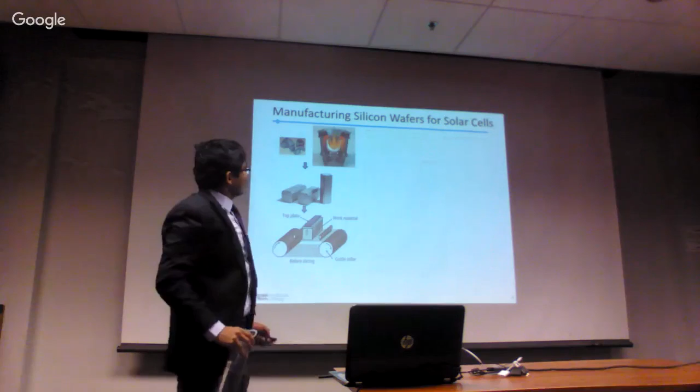I saw him as I was driving in, I saw him walking. Okay. Everything, so we are recording by 3.5. So this is the camera also recording. Here you go. I have another thesis. For somebody? I don't know. Okay. So this one is recording. Somebody going to adjust the lighting to make sure that you're visible? Okay. Is Dr. Neu here? Okay, I'm starting to record. Ooh, look at that. Record is on. Share is on. Right. Now I'm starting. Great. Can you see if I'm standing here? Do you see it? This works for you.

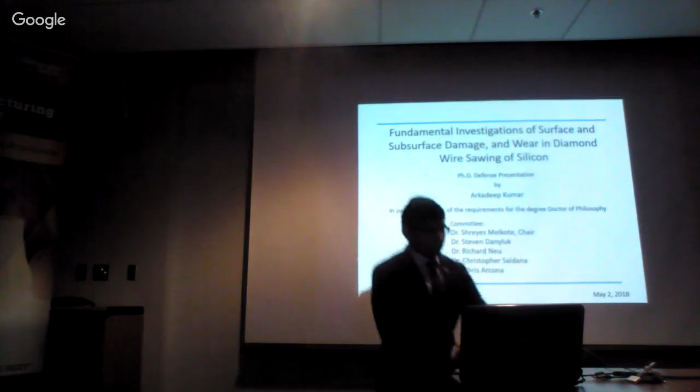So, do you think these lights? You don't want to be in the dark. They won't be able to see you. I wish there was a way to adjust. Only this thing? Okay, yeah. What do you want to do with the lighting? Unfortunately, I've only this bank of lights to go. Only this one, not that room. Okay, what about this? So this is the yellow light. So this one is the one. Can you see? So that's the YouTube one, and this one is recording whatever is live. You see the camera? All right, ready? Okay. Ooh, sorry. You okay?

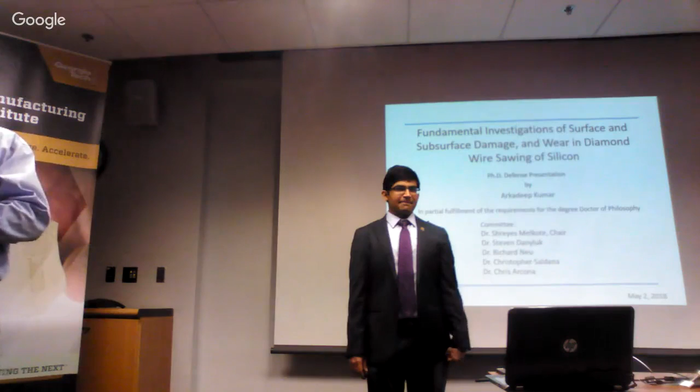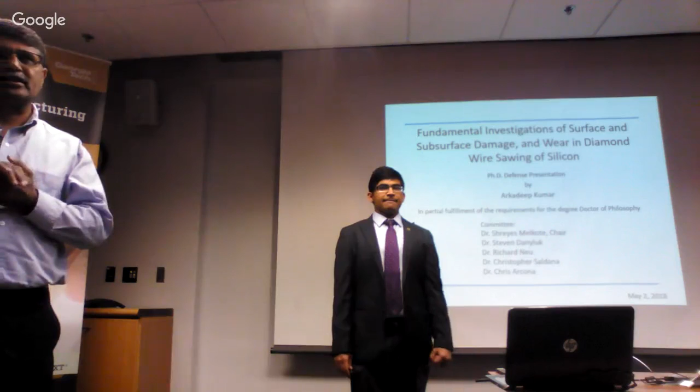It's obviously an important milestone in a graduate student's career. And so, just a brief introduction to Arka. Arka got his undergraduate degree in mechanical engineering from Jadavpur University in India, and came over as a direct PhD student. So it's taken him a little longer than a typical master's student would take to get to this point, but nevertheless, that's understandable. And he's been working in this area of sawing of silicon for photovoltaic applications since he started.

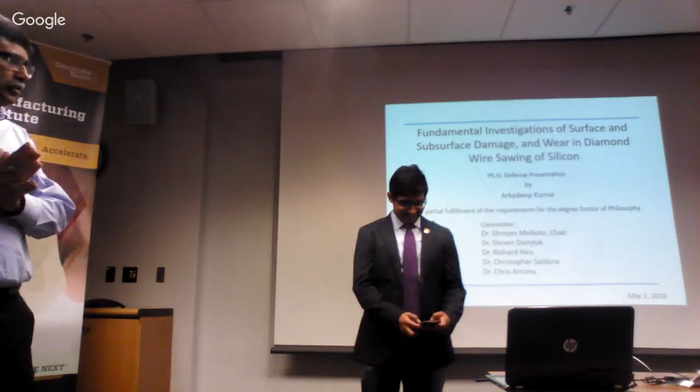Arka is looking forward to, notwithstanding some of the mishaps he's had as far as his health is concerned, that some of you know, he's looking good today, and is all ready to move forward with his professional career. He has accepted the ITRI Rosenfeld Fellowship with Lawrence Berkeley National Labs, and he will start next month if all goes smoothly here. And that's what he's going to be doing for the next couple of years, as a postdoctoral fellow. So without further ado, I'll turn it over to Arka.

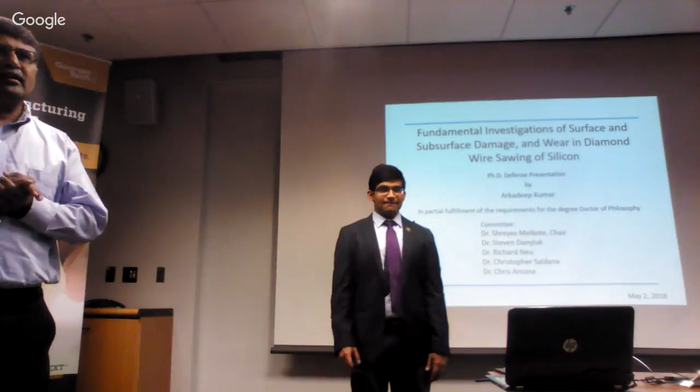In terms of logistics, I've advised him to keep his presentation to about 45 minutes. If there are burning questions, feel free to interrupt and ask him. If there are detailed discussion type of questions, please reserve them to the end of this presentation, and then we'll have an open session, and depending on the committee's preference, we might have a closed session as well. All right, Arka, it's all yours.

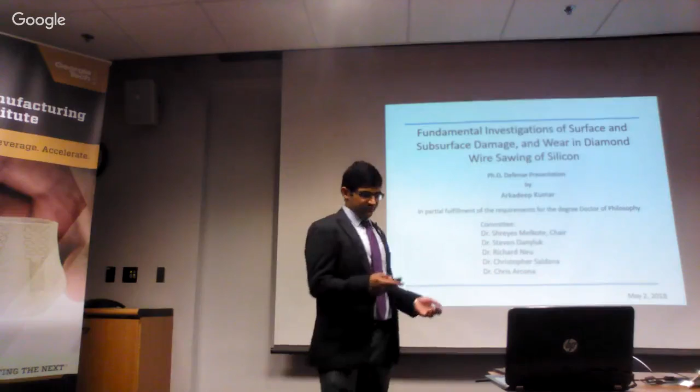Thank you so much, Dr. Melkote, for the very kind introduction. In the interest of time, I'll start with the presentation. So welcome everyone to my PhD defense presentation on the fundamental investigations of surface and subsurface damage and wear in diamond wire sawing of silicon.

As an outline of the presentation, first I'll introduce the diamond wire sawing process, which is used to manufacture silicon wafers for photovoltaic applications, solar cells. I'll talk briefly about the challenges currently faced in this diamond wire sawing process, which will help us motivate the research objectives to address those challenges, and then talk about the research tasks and findings throughout my PhD research. Then I'll conclude and mention the contributions to the field made by this PhD thesis.

To reduce the cost of solar cells, we have to see where we can reduce the cost most significantly. 30% of the cost comes from the substrate of solar cells, which are the silicon wafers. We can reduce the thickness of the silicon wafers, which saves material and hence reduces the cost. However, reducing the thickness from 200 micrometers, the current state of the art, or about 180 micrometers over the years I've been doing my PhD, to 100 microns, which is the goal of DOE SunShot, we also have to make them stronger.

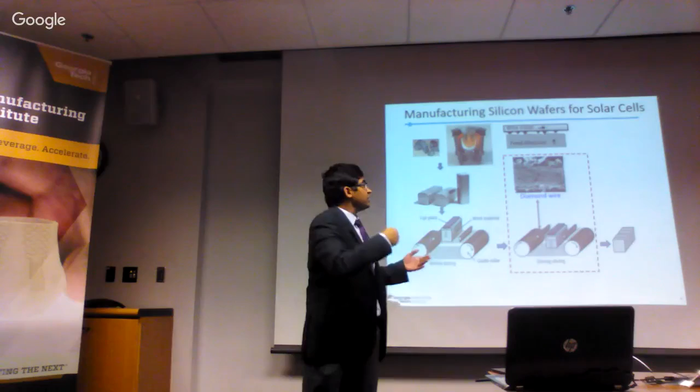This could be simulated in our lab scale experiments with the scribing or scratching process, because that's how the abrasives on the wire, as they are traveling through the wire, are removing silicon from the ingot and slicing them into thin wafers.

To complete the story of solar cells, the wafers are further processed into solar cells through etching, doping, giving an anti-reflective silicon nitride coating, which makes it look blue as the solar cell which is passed around with you. And then the solar cells are put into modules, which go on our rooftops to give us energy.

These cracks can propagate when the silicon wafers are processed into solar cells with processes like etching to remove surface damage, then doping, handling of these wafers to make them into solar cells, putting them into modules, or even during usage. When they're on our rooftops, there's thermal expansion going on, hailstorms, etc. And these break more easily because of these micro cracks.

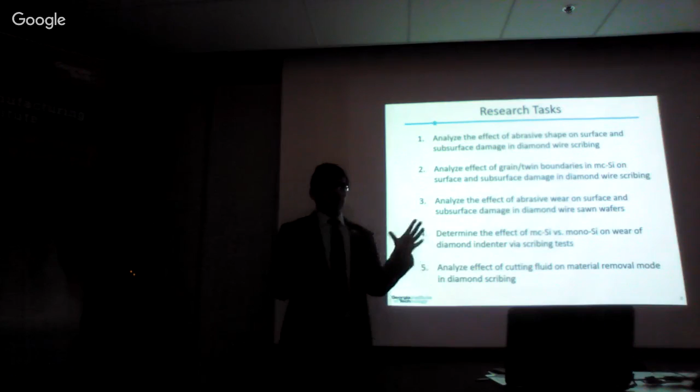And the cutting tools here are the diamond abrasives of different shapes and sizes. We see from prior literature in indentation experiments or scribing with idealized shape indenters on brittle materials like glass, silica, and even silicon, that the different shape of the indenter would affect the stresses created below the indenter in the material differently. If it's a sharp-shaped indenter, there'll be a plastic zone near the contact region, and then there'll be a median crack and lateral crack formed during loading and unloading of the indenter.

Whereas if we have a rounder shaped abrasive or rounder shaped indenter, like a spherical indenter, it will not create as many cracks, it will only create a plastic zone. So the shape of the indenter critically affects the stresses and hence the material removal mode, whether it is ductile or brittle with cracks formed in the indentation and scribing process. But in this PhD thesis, I'm looking at the effect of actual abrasive grit shapes, which are not as idealized as indenters. So let's look into that.

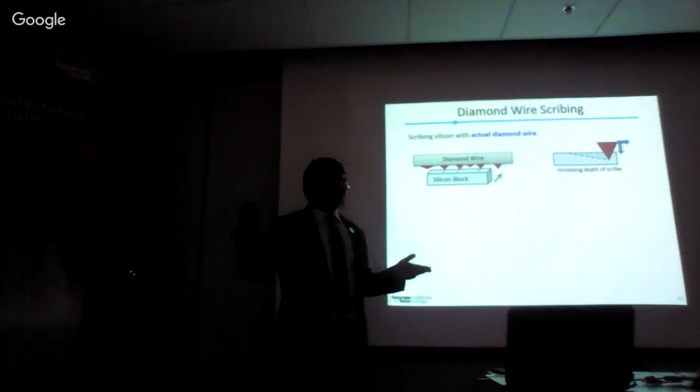We don't want the groove created by one abrasive shape to be superimposed by the groove created by another abrasive shape. We don't want any confounding effect, and that's why we are translating the silicon block perpendicular to the diamond wire. So each abrasive shape is creating a separate groove, which we can analyze and find the effect of each shape. We use increasing depth of cut scribes, as I was explaining before, so that we can find the ductile to brittle transition or the depth at which the first crack appears. And then we can compare the different shapes.

So for this experiment, we take a piece of diamond wire, and I hand out 2 diamond wires. These are written as Saint-Gobain confidential, so everything remains in this room.

Anyway, so this is the diamond wire we got from the manufacturer of the diamond wire, where you see these are the tiny abrasives attached to the wire with nickel coating. We put that diamond wire on this fixture, which I fabricated.

I can hand out the fixture as well. So this is the fixture. And so as you see here, the wire is held between 2 tightly tensioned screws. So the wire is very rigid in place. It can act as an indenter and not fly about while I'm doing scribing perpendicular to the wire.

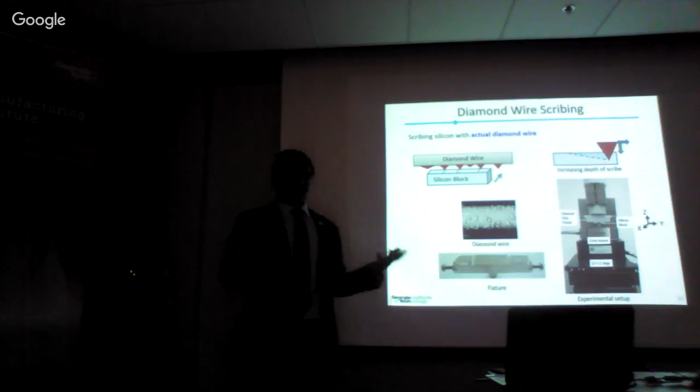There is a micro-milled groove here, which we cannot see in this image, which holds or supports the wire in place so that it doesn't move at all when we're scribing perpendicular to the wire. This fixture goes on this micro-milling setup, which is in our lab, where it is attached to this top attachment. The silicon block is below that, and the silicon block is put with a base plate on a force sensor, the Kistler MiniDyn, and then the force sensor is put on an XYZ stage, which is controlled by a computer, and I can scribe with increasing depth of cut.

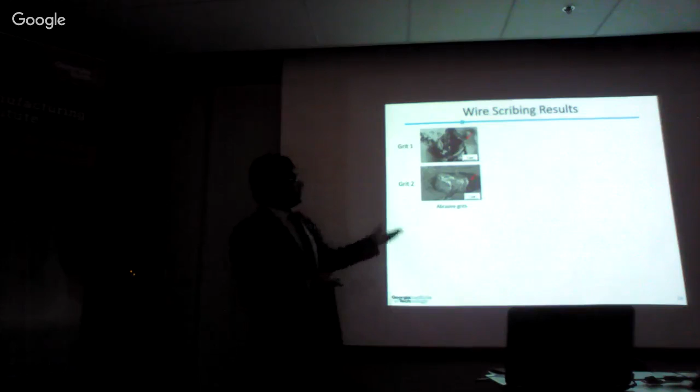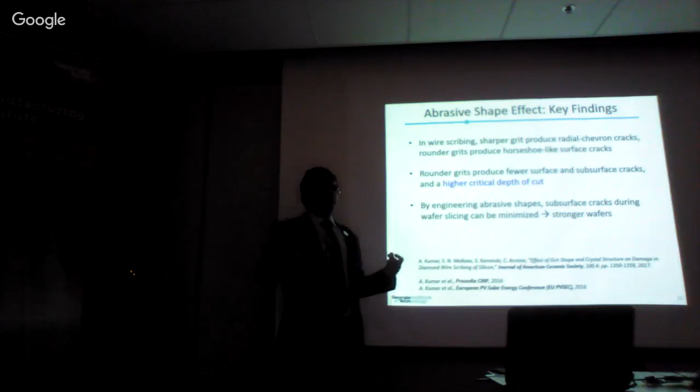Now, how do we take this result to the actual diamond wire sawing process? So the implication of this research is we can engineer the grit shapes so that we have more rounder shaped abrasives and reduce the subsurface and surface cracks in wafer slicing, which can increase the strength of these wafers and thus reduce the thickness of these wafers, reducing the cost of solar cells. Moving on to the next task, the effect of multicrystalline silicon.

I'll pass around multicrystalline silicon examples we have here, where you see there are a number of grains and grain boundaries. This is a blown up picture which shows it very clearly. Multicrystalline silicon compared to monocrystalline silicon, and I'll pass some monocrystalline silicon as well, which are scratched or scribed, so that you can understand there's not much grain boundaries in there.

These are the grain boundaries which you see here, and the straight lines are more like twin boundaries. Grains and twins are crystallographic defects formed during the solidification process when nucleation occurs from the melt and different parts of the melt solidify.

Now, one of the challenges, as I was speaking earlier, in cutting multicrystalline silicon are these grain and twin boundaries, apart from silicon carbide, nitride inclusions, and dislocations, which affect the cutting of multicrystalline silicon wafers, leading to lower fracture strength of these wafers compared to monocrystalline silicon, and that leads to lower manufacturing yield. More wafers break when we are cutting multicrystalline silicon compared to cutting monocrystalline silicon.

And the second challenge is greater consumption of the expensive diamond wire when cutting multicrystalline silicon compared to cutting monocrystalline silicon. Now, to address the first challenge, we want to find the effect of grain and twin boundaries in multicrystalline silicon by diamond scribing experiments, where we want to find the surface and subsurface damage. So we are using a similar methodology as the previous experiment, but one difference: we are scribing on multicrystalline silicon blocks using the diamond wire setup. And we scribe across the grain and twin boundaries.

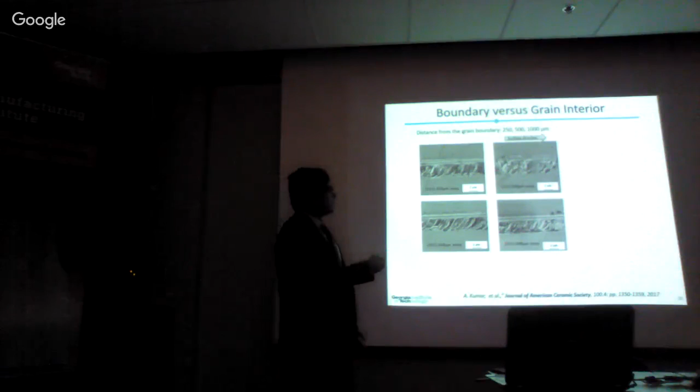And that trend continues about 500 micron away. However, the differences are starting to diminish. You can see now this one is also showing more frequency of cracks. And if we move like 1000 micron away from the grain boundary on two sides of the adjacent grains, 111 and 331, we see there's not as much difference in the surface morphology of the scribe, about 1000 micron away.

So with these results and other results we found, these are representative, we found that the cracking behavior changed near the grain boundary, as we saw in the previous slide, but they become similar away from the boundary. And we hypothesized that the reason for this is the mechanical properties being different at the discontinuities like grain and twin boundaries, which is creating the differences in the surface morphology or cracking frequency across the boundary.

So the key findings or takeaways from this task were that the cracking frequency is changing at the vicinity of the boundary, but the frequency in adjacent grains away from the boundary was similar. Now, what is the implication of this study? We can expect that discontinuities in multicrystalline silicon like grain and twin boundaries would influence the stresses on the abrasive and can influence wear, which is one of our burning questions and challenges in diamond wire sawing. With this, we'll segue to the next topic, which is the wear.

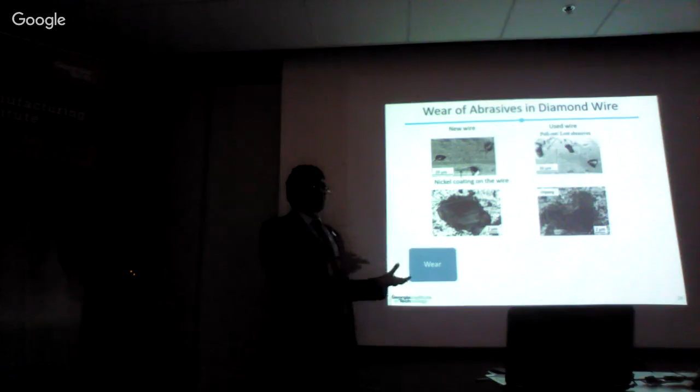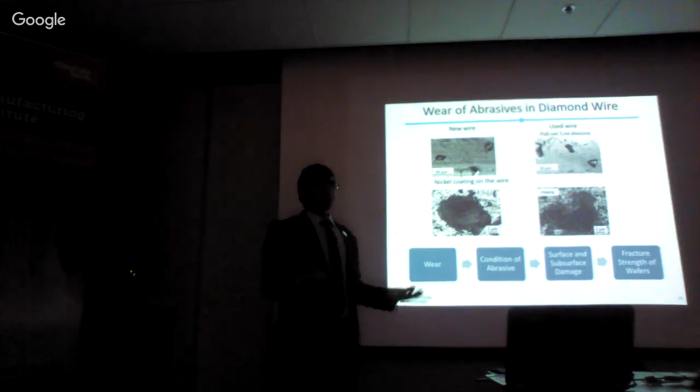Compared to that, a used wire, which is from the used wire side, we found some of the abrasives are missing, or they are lost because they are pulled out during this cutting process. Some of the abrasives have chipped off, as you see here, this fractured diamond. Now, this means that the wear of abrasive is affecting the condition of the abrasive, which will in turn affect the surface and subsurface damage of the silicon wafers it is cutting, and that in turn will affect the fracture strength of the wafers, which is what we are finding in the next few slides.

When you compare the surface of the wafers cut by the two different wire levels, so we are extracting wafers from the new wire side and wafers from the used wire side, and if you just see the surface morphology of the wafers by SEM, qualitatively you can see there is a lot more chipping going on for the wafers cut from the new wire side, whereas the wafers cut from the used wire side show mostly smooth surface. There are scratch marks and some intermittent chipping.

And this was validated from our surface roughness measurement, where we found the wafers cut from the new wire side show a lot larger roughness and also a lot of scatter, which means there's a lot more chipping going on. Compared to the wafers cut from the used wire side, it shows a smaller roughness and tighter distribution. So it's much more smooth.

When we did Raman spectroscopy on these silicon wafers, we found that silicon which is cut by the new wire side, from the left side of the ingot, shows mostly the silicon I peak, which is 520 cm⁻¹ wave number, indicative of silicon in its pristine state of diamond cubic structure, meaning silicon is not undergoing as much phase transformation. It is remaining brittle, and that's what we see here, because there are a lot more micro cracks on the wafers from the new wire side.

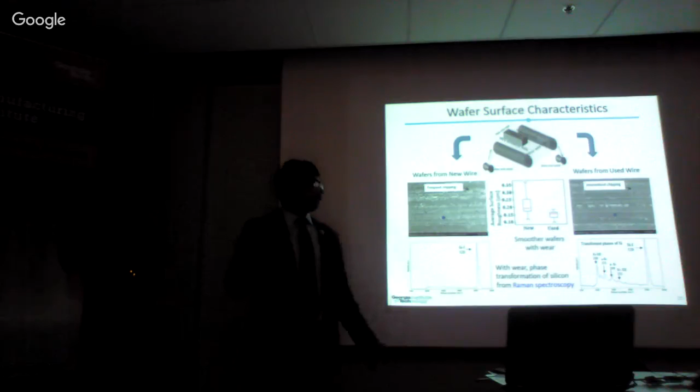And silicon goes from silicon I to the beta-tin metastable phase, which is not found after the unloading happens, and then ends, based on the rate of unloading, as silicon III, silicon XII, amorphous silicon, and different silicon phases. These silicon phases are more ductile. They are not as brittle. And that's what we see even on the surface, that the wafers cut from the used wire side have a more ductile surface.

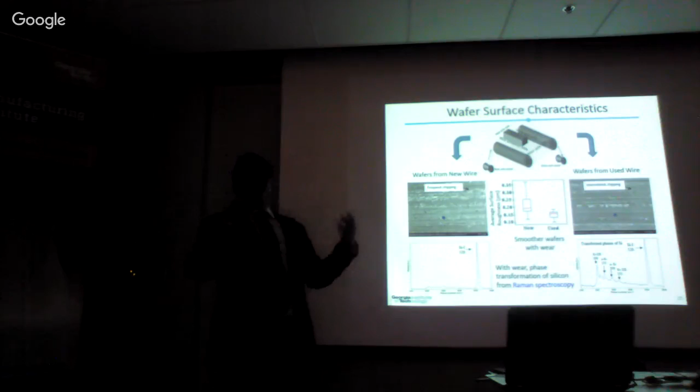So silicon is being removed like butter, not much brittle material removal taking place. So you might say, oh, this is great. With used wire, we have better wafers with smoother surface. This is what we want. We have reduced micro cracks. But there is a twist in the tale, which is the subsurface cracks.

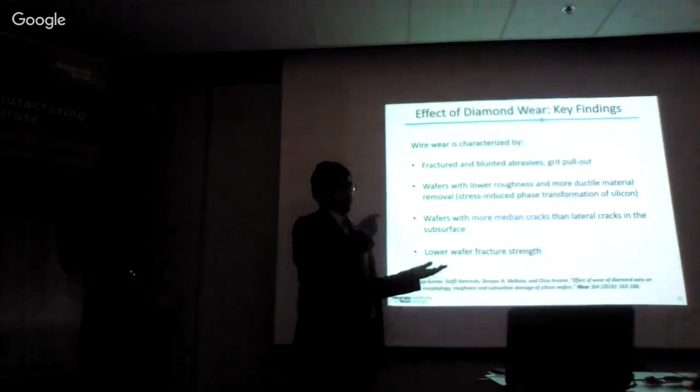In summary, the key findings from this task were that with wear of the abrasive, we see fractured and blunted abrasives, and even some of the abrasives pulled out or lost. And this affects the force per abrasive, as I was speaking in the previous slide. And the force per abrasive affects the micro cracks, being median cracks or lateral cracks. But with wear, the wafers are formed with lower roughness and more ductile mode material removal because of stress-induced phase transformation of silicon.

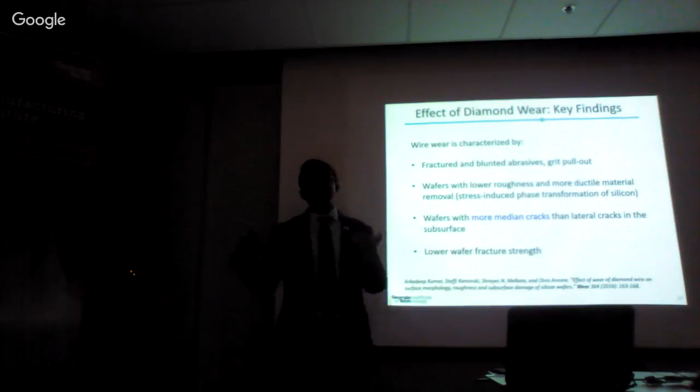But that's the story only on the surface. If we literally dig deeper into the subsurface, we find the wafers have median cracks when cut by the used wire. More median cracks than lateral cracks, which reduces the fracture strength of the wafers.

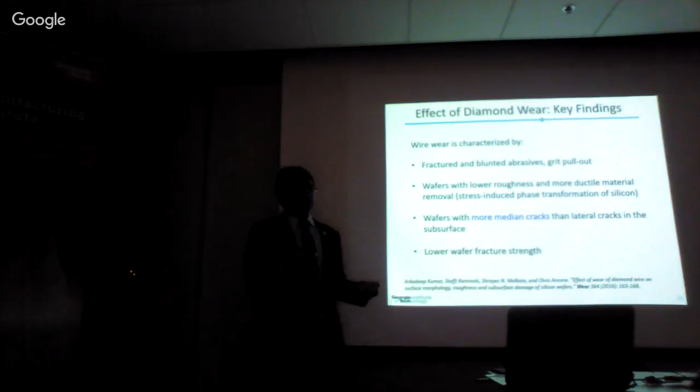Moving on to the effect of multi-crystalline silicon on the wear of diamond. So this task addresses the challenge of why there is higher consumption of the expensive diamond wire when cutting multi-crystalline silicon compared to monocrystalline silicon. To compare that, we revisit multi-crystalline silicon having a lot more grains and twin boundaries, as we found in our previous task, compared to monocrystalline silicon. And I'll pass out the two samples with the indenter which I used in this experiment. And you can see the scratches made across the grains and twin boundaries.

We scribed multi-crystalline silicon and monocrystalline silicon with a single tip diamond indenter. One example of that indenter is there in the sample passed around. And when we monitor the wear of the diamond due to multi-crystalline silicon and due to monocrystalline silicon, we analyze the scribing forces. If you remember in our setup, and I'll show it again, we had force being measured with a force dynamometer. We analyze the surface morphology of the diamond here, not the silicon, because we are interested in finding the wear of the abrasive diamond.

Third, we find the radius of curvature of the tip of the diamond, how it is changing with more scribing for multi-crystalline silicon and monocrystalline silicon, so that we can compare them quantitatively. And finally, we also do Raman spectroscopy on the diamond, not on silicon, to find if there is any stress-induced phase transformation of diamond. Diamond also undergoes stress-induced phase transformation at very high stresses, and that's what we want to find, if there is any phase transformation.

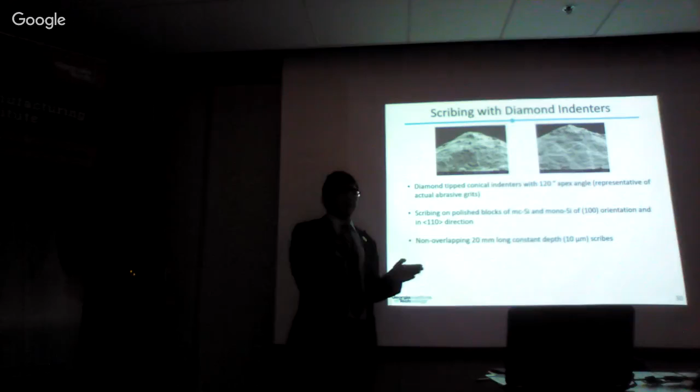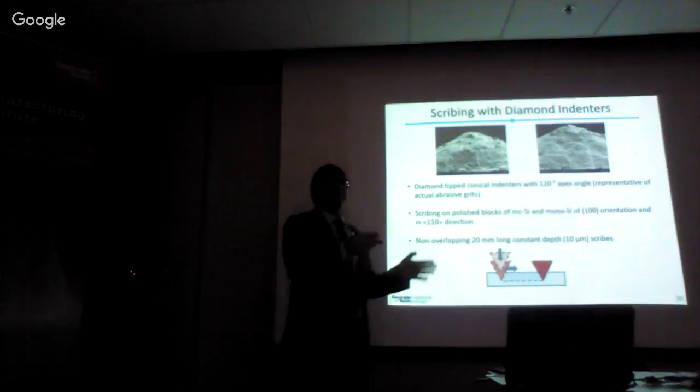Now, the scribes are made non-overlapping so that each scribe is identical in everything. We are just monitoring how much the material is wearing the abrasive at a constant depth of cut of 10 micron. What that means is we engage the indenter by 10 micron depth and then scribe for 20 millimeter. And we repeat the scribes many, many times and monitor at regular intervals, stopping the experiment for both mono and multi-crystalline silicon, and then checking the surface morphology of the diamond and the radius of curvature of the diamond, how it is changing with wear.

Higher scribing forces are expected to create higher stresses on the abrasive, because here we are using the same shape of the abrasive. So we can assume similar contact area between the abrasive and silicon. If the forces are higher with similar contact area, we can expect the stresses are higher, which is the case for multi-crystalline silicon.

And we are hypothesizing that the multi-crystalline silicon is giving higher forces because of the discontinuities in multi-crystalline silicon, like grains and twin boundaries, and possibly also inclusions like silicon carbides and nitrides, which are entrained into the melt during solidification of multi-crystalline silicon ingots.

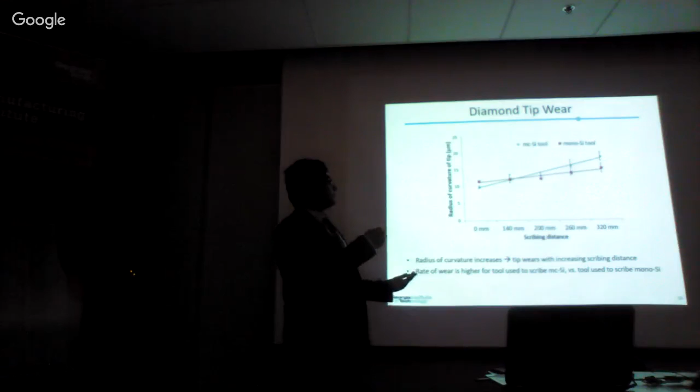So this is consistent with the story that the forces are higher in scribing multi-crystalline silicon using diamond indenters, and that is expected to cause higher stresses and more wear of the tool scribing multi-crystalline silicon compared to the tool scribing monocrystalline silicon.

And I talked about doing Raman analysis to find the stresses. Diamond as a material has a Raman peak at 1332 centimeter inverse, which is the pristine diamond peak. Diamond can phase transform into graphite and other phases, but that requires very high stresses and temperature. We did not find that in our experiments, even though some others have found limited graphitization in the diamond wire sawing process. What we found is that both tools showed a peak before scribing at 1332 centimeter inverse.

After scribing, both the peaks shifted to the right hand side, to 1334.4 centimeter inverse for the tool scribing multi-crystalline silicon and 1334 centimeter inverse for the tool scribing monocrystalline silicon. So a shift of about 2 and 2.4 centimeter inverse. And this shift means there are compressive residual stresses created in the diamond due to the scribing process.

If we look at prior literature about the peak shift of diamond for residual stress, we find that about 1.625 centimeter inverse of peak shift happens per GPa of residual stress. If we use that model to estimate the residual stresses created in these diamond abrasives, we find a compressive residual stress of about 1.4 GPa for the tool scribing multi-crystalline silicon, compared to about 1 GPa for the tool scribing monocrystalline silicon.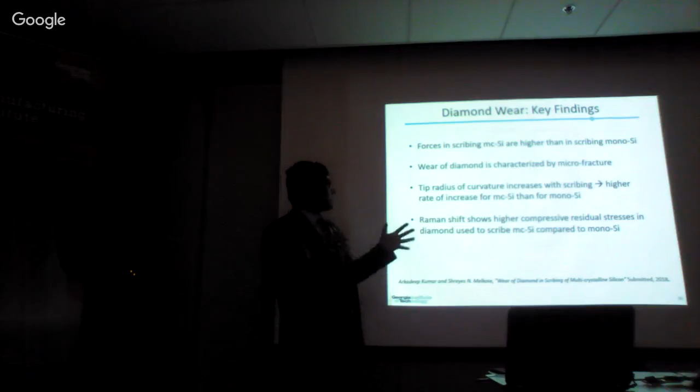So the key findings from this task were: the forces in scribing were higher for multi-crystalline silicon, and the wear of diamond is characterized by microfracture, mainly in the diamond wire sawing process, which we are simulating by our scratching process. The tip radius is increasing at a higher rate for multi-crystalline silicon compared to monocrystalline silicon, consistent with the higher forces we see for the multi-crystalline silicon scribing, and the Raman shift shows higher compressive stress.

Moving on to the last task about the effect of cutting fluid. Now, cutting fluids in machining operations are used as coolant, as lubricant, and to take away chips. But here we are trying to find an unexplored aspect, which is if the cutting fluid could affect the ductile mode material removal of silicon.

To do this, we scribe using again single point diamond tip indenters on monocrystalline silicon of 100 orientation and 110 direction, and we scribe under dry condition and then using the cutting fluid. The cutting fluid was supplied to us by our industrial collaborator. We analyzed the surface morphology of the scribe. Confocal microscopy is used to find the critical depth of cut, and we also use Raman spectroscopy to find the phase of silicon after scribing.

So some prior work in this space had been done by Dr. Danyluk's group some time back, where they found that different liquids in contact with silicon, like ethanol and acetone, gave different wear rates of silicon when scribed under identical conditions of load and the same indenter. So fluids are known to have an effect on the material being scribed. Here we want to find if the cutting fluid, which is actually used in industry, can have any effect on the ductile mode material removal.

So we are simulating the wire sawing operation in industry by the scribing process, and in this experiment again we use the increasing depth of cut scribe because our objective is to find if using the cutting fluid gives more ductile mode material removal compared to using dry conditions. So we want to compare the critical depth of cut, which is the depth at which the first crack appears.

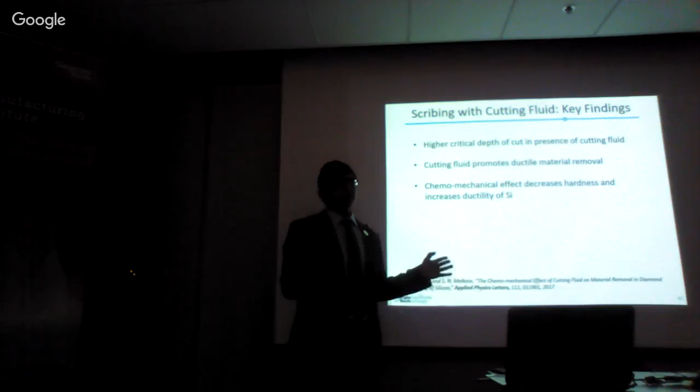The key takeaway from here is we can possibly alter the chemistry of cutting fluid in future. We can soften silicon, reducing brittle fracture and promoting ductile mode material removal, and thus could speak to our challenges of reducing the micro cracks in the surface and subsurface of the solar silicon wafers.

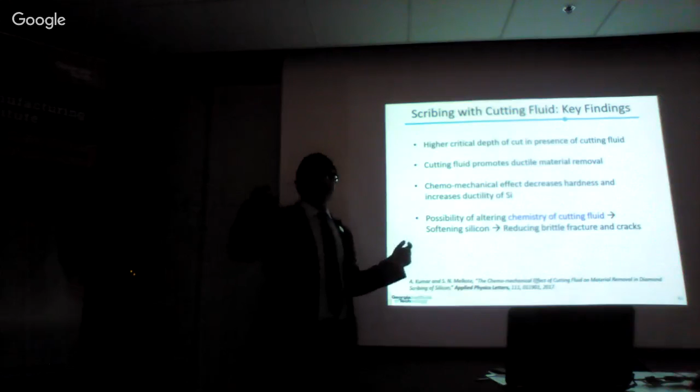Moving on, to wrap up, I'll revisit the challenges, look at the research objectives which were motivated by the challenges, and talk about the key findings which have addressed those challenges. So the first challenge we mentioned was the micro cracks in surface and subsurface. And one of the ways of addressing that was the effect of the actual diamond abrasive shapes. We found that rounder abrasive grit shapes reduce surface and subsurface cracks during the wire scribing experiments.

Secondly, for the micro cracks on surface and subsurface, one of the research objectives was to find the effect of cutting fluid on the material removal mode being ductile or brittle. And we found using the cutting fluid and altering the chemistry of cutting fluid would promote more ductile mode material removal, thus reducing the micro cracks.

The next challenge was cutting multi-crystalline silicon because of the grain and twin boundaries, apart from other inclusions like carbides and nitrides, which was one of our research objectives, to find the effect of grain and twin boundaries. And we found that there is a difference in crack frequency in the vicinity of the boundaries, but the crack frequency becomes similar away from the boundary in adjacent grains.

And the last challenge which we addressed was about the wear of diamond wire. This was related to cutting multi-crystalline silicon, where there was greater consumption of the diamond wire compared to monocrystalline silicon. And we found that multi-crystalline silicon shows higher forces and more wear of the diamond overall compared to scribing of monocrystalline silicon.

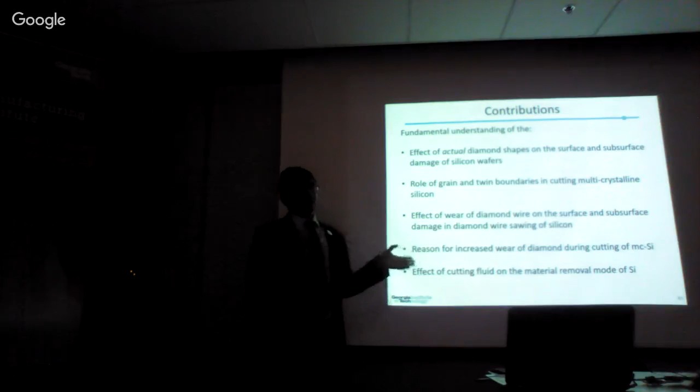We found the effect of wear of the diamond wire on the surface and subsurface damage, and hence the mechanical integrity and fracture strength of the wafers. We found the first reasons for the increased wear while cutting multi-crystalline silicon, and could explain the increased wire consumption for cutting multi-crystalline versus monocrystalline silicon. And finally, I found the effect of cutting fluid to promote ductile mode material removal of silicon.

These are some journal publications, some are still submitted, and some conference proceedings.

And with that, I'll end with acknowledging my PhD advisor, Dr. Shreyas Melkote. Thank you for accepting me as a student and mentoring me throughout the years to make me better, raising the bar higher and higher, even till yesterday, and will continue even in future. Dr. Steven Danyluk, who had given me advice not only about research, but more about life. Dr. Rick Neu and Dr. Saldana for being available all the time for advice on my research. Dr. Chris Arcona, who is not another committee member, but will join me later.

And Steffi Kaminsky at St. Gobain, who had critiqued my work and given me advice from their industrial collaboration point of view and given me the challenges they face. St. Gobain Northborough Research Center for funding my work in initial years, and then NSF GOALI Grant for funding my later years of my PhD. My lab mates in past and present, many have graduated, and even now who have been very helpful to me for research and life overall, which brings me to my parents, Shipra and Ashish Kumar, who are there being the rock pillars of support from India, and they're right now on YouTube viewing this presentation.

My friends here, who are my family, who gave me a hand every time I've fallen down, like recently with a fractured arm. They've given up their sleep to ensure mine, going to hospital and whatnot. Asha for Education community, which is a community I love and given me support beyond academic work at Georgia Tech. And finally, the Georgia Tech community, with all their services, making my presentations better, making my writing better, even Stinger, taking me home late at night. With that, I'll thank everyone for your time and attention, and I'll take questions.

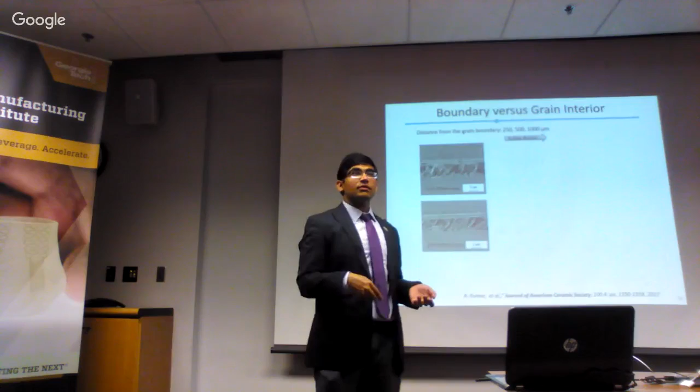Other questions? Yes. I had a quick question on the Raman you showed on the diamond tip itself. It was interesting to see the peak getting narrower. It seems like the diamond might be getting more ordered. So that's the full width half max which you are speaking of.

When you say it's become more narrow, the diamond might be getting more ordered, and that might be because of the compressive residual stresses happening as the diamond is scribing across silicon. I understand the lattice is getting deformed; that's why the Raman spectra is getting more ordered. So most likely it is because of the compressive stresses. And that's what we also find from the residual stresses having a rightward shift, which is compressive residual stress. So I think that is consistent with what you are saying, that full width half max is becoming narrower.

Are the residual stresses large enough to deform the crystal lattice, so that you estimate? Now, the reason we are seeing residual stresses, thank you for this question. This is one opportunity for me to explain residual stresses, why it is happening. So whenever we are stressing a material, if it is elastic, it comes back and there is no residual stress. Only if a material undergoes some plastic deformation and cannot spring back to the initial form will it have some residual stresses.

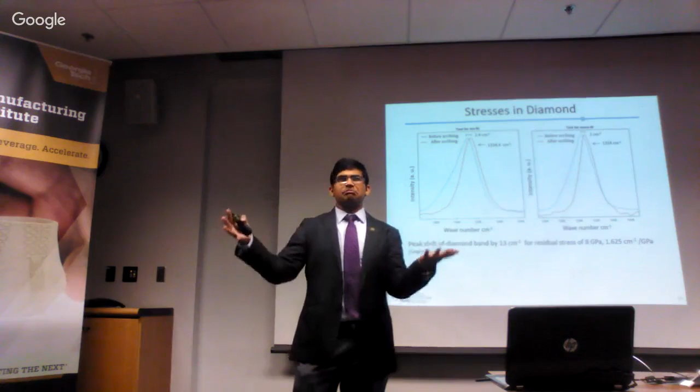The fact that we are seeing a peak shift indicates that the stresses are large enough to create some plastic deformation, and the material doesn't come back to the same phase or same structure as before. So there is some lattice deformation taking place, and that's why we see the residual stresses by the peak shift. If there were no residual stresses or no lattice being deformed, we would not have seen the peak shift. Any other questions from the audience?

Okay, go ahead. So you said that if you use cutting fluid, then there's more plastic deformation and it's easier to cut, with fewer cracks. But does it have any implication on the final use of the silicon wafer, because you have changed the chemical composition of the surface? That's again a great question. The cutting fluid I used in my experiments was supplied by the industrial collaborator, and they already use it in their process. We just wanted to find if there is an effect of cutting fluid, apart from cooling and lubrication, on the mode of material removal being ductile. So they're already using it, and they're cleaning the surface later on by some method.

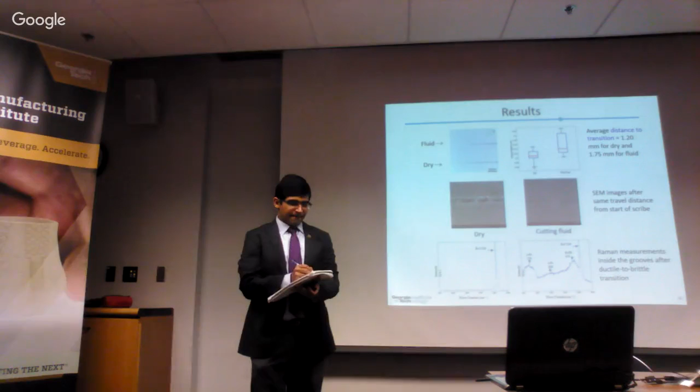And the other was that the fluid reduces friction in some way, right? And that's not discussed at all. How do you rule out these other possible explanations and conclude that it's this chemo-mechanical effect? So about friction, that is the first thing which comes to mind while using cutting fluid, because it's known to reduce friction in machining operations.

We found that the friction coefficient does not change significantly, because this cutting fluid is a water-based cutting fluid. The chemicals are proprietary, so they don't tell us what it is, but it's mostly sodium and potassium hydroxide or some salts of it. They sent me a concentrated chemical which I diluted 97 ml to 3 ml. So it's mostly water with some ions like sodium and potassium. The friction coefficient did not change much between the cutting fluid and dry conditions.

So I had thought about that as the first reason. Even Dr. Vandenberg also talked with me about this, friction being a factor. So we thought there might be other reasons for the ductile mode machining, which we find here. Yeah. Just one comment before you go.

You didn't mention that in your dissertation document. Oh, okay, I see. In fact, I did a word search on friction. You never use the word friction anywhere, so it doesn't appear. Okay, I'll mention this. But if you did do those measurements, then that's important. Right. I think that's important.

Can you say something about how you actually computed or estimated the friction coefficients? Sure. So the friction coefficient was found by taking, in all these experiments, we have the force dynamometer capturing the forces. So we have the tangential force and the normal force, and we take the average. Sorry, not average. We take the tangential force by normal force to get mu, which is the friction coefficient.

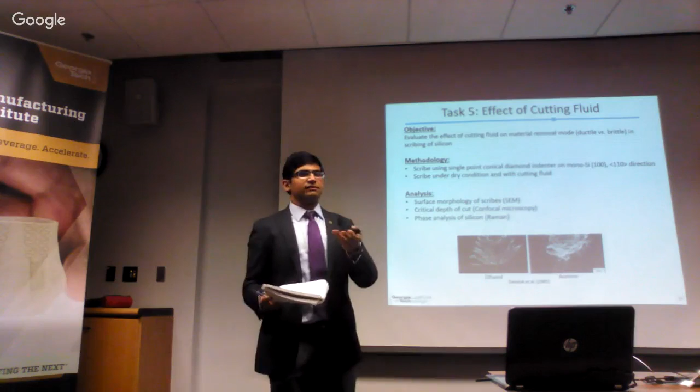So my analysis is based on whether the cutting fluid, just like in previous work by Dr. Danyluk and others, is showing some change in the surface characteristics, changing some dislocation dynamics, or due to surface charges created in an electronic material like silicon. That is affecting how silicon is becoming more ductile or reducing the hardness, because if dislocations move more readily, it is becoming softer. But that's your hypothesis. That's a hypothesis.

Now, the question you're raising about whether the fluid film is indeed changing the stresses, I feel that the configuration here, with the indenter getting in touch with silicon and then creating the scribe, is in very close contact between the diamond and silicon, and the fluid film thickness may not be enough to create a change in stress, or for some stress to be taken by the fluid. That hypothesis may not apply in this case.

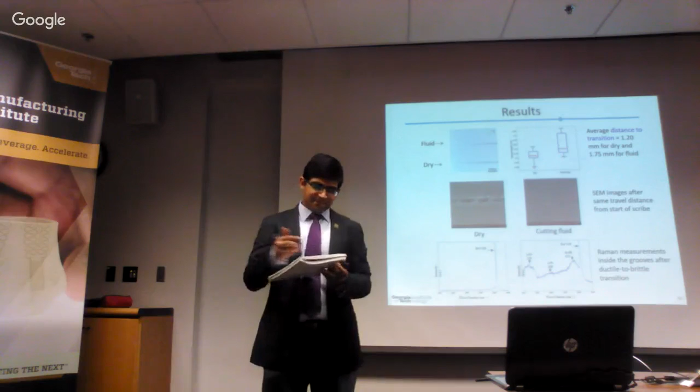That's still your hypothesis. Definitely. Because you haven't tested whether there is a fluid film that is bearing some of that load and thereby reducing it. That could potentially be the reason why your hardness is lower. One could argue, I guess.

Right. So your hypothesis is that the fluid is changing the properties of the material, whereas it's not affecting the way the load is being applied to the material. It could also be affecting the load, but the way you're applying the load, is that any different for the two cases with and without fluid? No, they're identical.

So my hypothesis is the material is getting changed because if we see the surface at constant travel distance after the start of the scribe, or if we see the Raman spectra as well, we see there is more softening or ductile mode, and also the Vickers hardness indentation which you're seeing.

Which means chemically there are some changes taking place. When you do that Vickers hardness, do you put the liquid on, or do you just do the indent? You flood it? I flood it. Okay. I mean, this was the scribing, but in Vickers also you flood it. Is there a difference in the depth of the indent with and without the fluid? So, do you see a difference in the depth of the indent with and without the fluid?

So here's the thing. That could be readily seen from these results. The confocal microscopy gave the depth of the groove at this point using the fluid, and at this point using the dry conditions. And the depth is higher, right? The Vickers indent, because indent is what I'm talking about. Yeah. Because, just building on Dr. Neal's question, it's a possibility that if indeed the fluid is bearing some of the load, it takes much greater load for you to break through that film to actually initiate fracture. And that could explain this result, potentially.

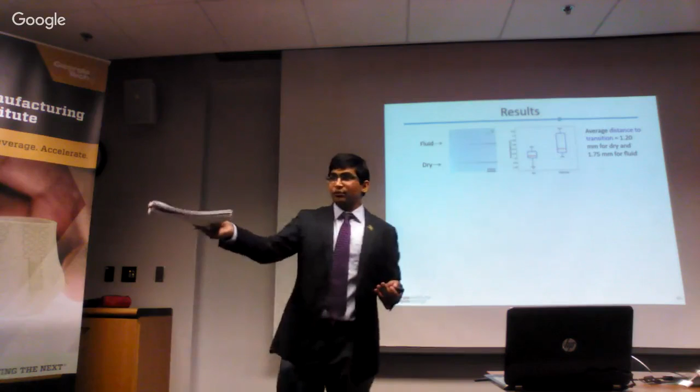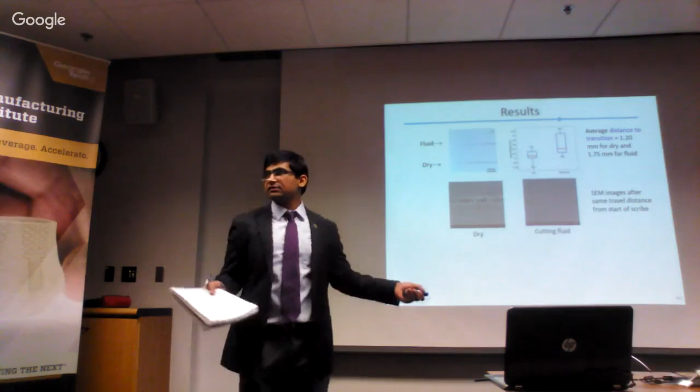Right. But I'll build on what you just said. One of the possible ways we can address this question is if the depth of cut is the same or almost similar. Was it the same? That's the question. Now, the depth of cut was measured at the critical depth of cut, which is the ductile to brittle transition. But if we compare, these are possibly at the same depths because they are at the same travel distance. So we are using the same increase of depth, 5 micron depth of increase over 5 millimeter. That's the scribe used. So they're expected to create the same depth because we are using the same machine condition. But in one case here, we see there's not much cracks formed.

Yeah, but the question really is the depth. If you were indenting, forget about scribe, if you're just indenting with and without fluid, if indeed the fluid is bearing some of the load, then I would expect the depth of that indent, even if you're applying the same travel distance, you're applying a certain load, the depth of that indent would be different if indeed the fluid is bearing some load. So did you notice any difference in the actual indentation itself? So the indenter here is programmed to indent at a constant load. We don't compare the depth, but what you're saying is comparing the indent depth. Yes. And that is fine.

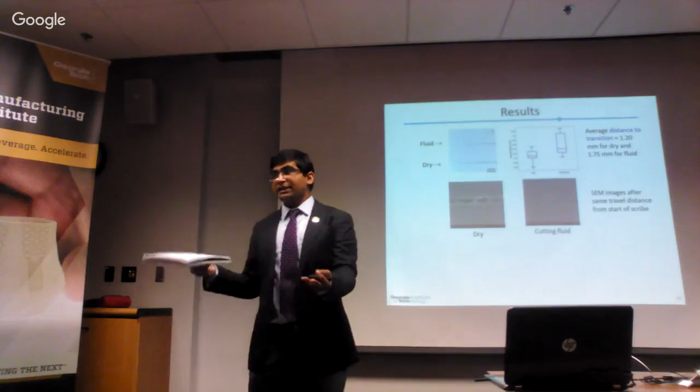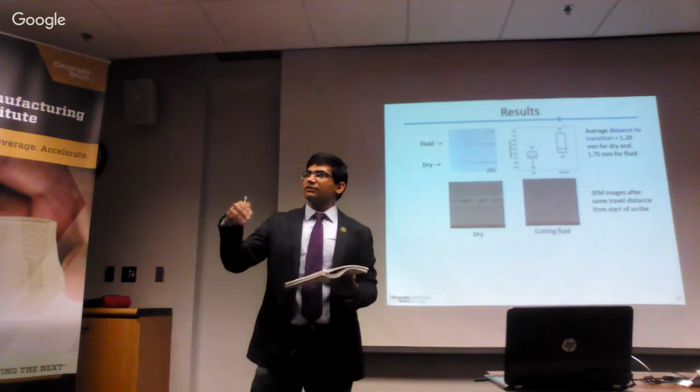But we have to also remember, Dr. Melkote, here we are simulating the scribing process and not indentation, because the actual wire sawing process is a scribing process. So there will always be dynamics of one thing moving over another, which means indentation might not be right. Yeah, we're just referring to the Vickers micro hardness. You said with the cutting fluid it's less. And so you're attributing that to the material being softer, but could it be less because there's fluid entrapped and you're going to a fixed load, and so some of that load is being carried by that fluid?

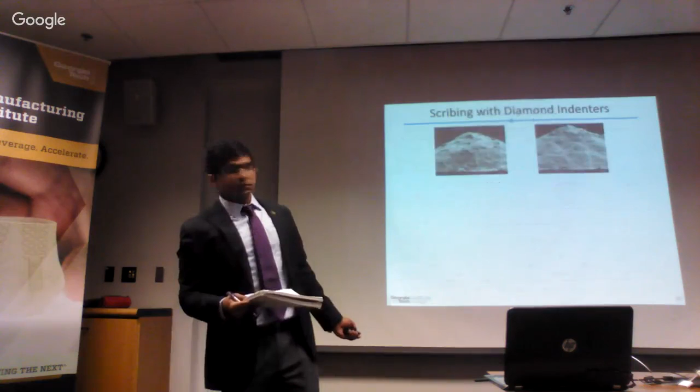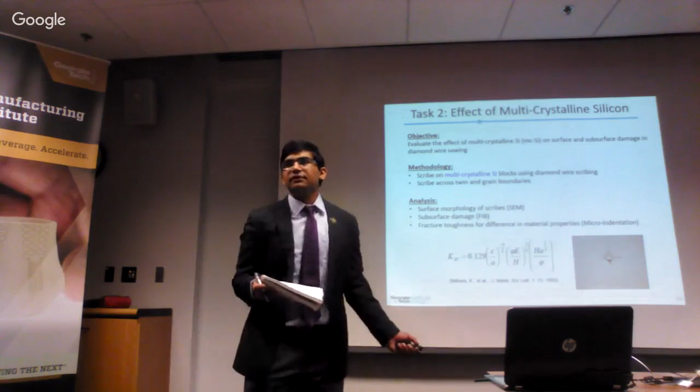So the process in which we find the Vickers hardness is by that formulation which I showed as the indent. It's based on the cracks being formed. It's the hardness, right? You're not measuring the toughness. Yeah, but the hardness is also measured directly with the empirical formula they have in the machine. Yeah, but that empirical formula is looking at the indent size. So with the fluid, it won't indent as much, so it'll be smaller, which in that case would actually say higher hardness. So it's not a higher hardness. You see my question? I understand your question.

So one comment to that question would be, we use the Vickers hardness to explain that the hardness is decreasing. In the actual process of wire scribing or wire sawing, we cannot say whatever is happening during a static indentation process is happening in a wire sawing process, because there are dynamic effects involved. The fluid film will have some weird thing going on versus when you're doing indentation. But I understand, if it is actually indenting with the fluid taking more of the load, then it would create more hardness. It doesn't.

You know, if I was doing this and got this sort of result, I would say, okay, let's just put some water on it. Something really simple. I know what that is. I don't know what's in this proprietary fluid. Do I get the same results, or do I get different results because the fluid is actually making some changes to the surface?

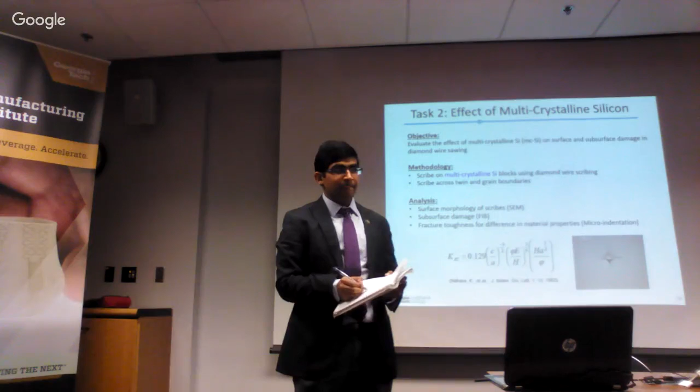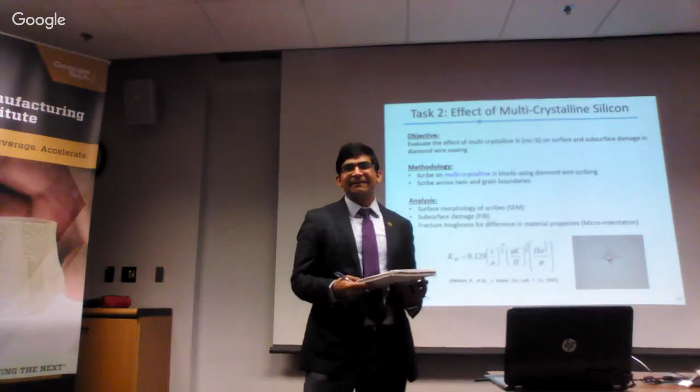Steve, so just to answer your question, Professor, yes, there is a big difference between fluids and how they behave in an indentation experiment. And you measure it by the size of the indent, and then you measure the median crack distances. Unfortunately, I don't remember what the results were that we got back in the 80s. We can look that up. Well, it's very intriguing, and so task 1 just gave us a teaser, like, oh wow, now I want to know more about the influence of different fluids.

So we investigated this, and our explanation was it's an electrostatic effect. So you have sodium and chlorine ions, or sodium and potassium, or something like that. You get adsorption on the surfaces. They basically create certain mechanical effects, electrostatic kinds of adsorption processes. So I think that's the answer. But fundamentally, you don't really know the answer. I don't know the answer.

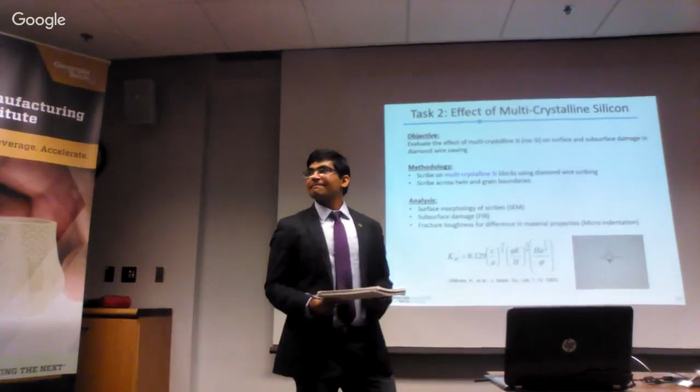The real fundamental reason. I think that there is still some debate about whether this is effective. So there are people who buy it, and there are people who don't buy it. So I think it's a fair question to raise. It's the explanation Arka's forwarded, and he's trying to validate that assumption by measuring hardness, but I think there's some good points raised.

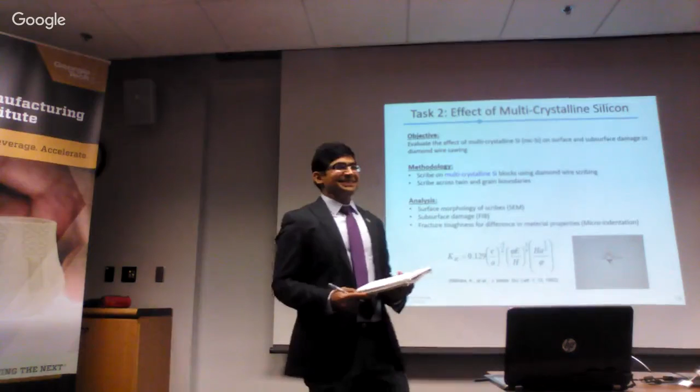So I'll make one more comment about this, and we gotta get off this topic, but the reason we in my group never pursued this dislocation explanation is because dislocations are not active in silicon at room temperature. You gotta get up to about 750 centigrade before dislocations actually are generated. So we didn't feel like we could explain it by a plastic deformation process. It had to be some other process. That's the way we interpret it. But what do you have to say to that?

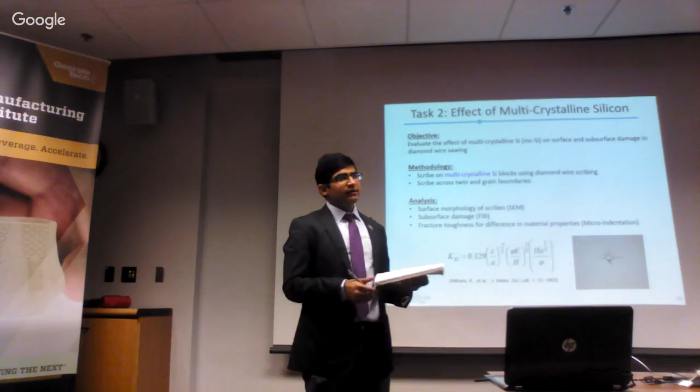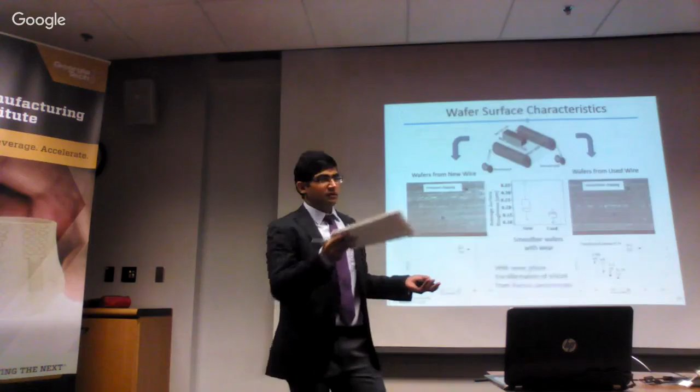So we see plastic deformation happening in the ductile mode results, right? And one possibility is the electrostatic differences which the sodium and potassium ions are creating. These are clear evidence that it's plastic, and even the Raman spectroscopy shows it's plastic. Why do you say that? Because from the surface morphology, material is removed and there are no cracks. But do you see dislocation emission? Do you do any kind of dislocation etching to show that there were actually more dislocations?

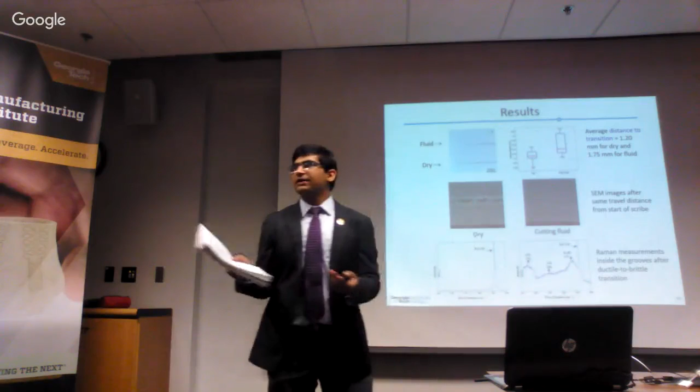So I understand the debate, but what Dr. Danlup pointed out was we are surely seeing softening, either from the hardness measurement, the surface morphology, or the Raman spectroscopy, showing that it is ductile. Now, whether dislocations are moving because of the electrostatic or zeta potential creating some change in the surface charges, that is one way of explaining it by the Rehbinder and Westwood effects. But you cannot verify it.

I have not verified the fact that somehow there is greater mobility of dislocations in the presence of the fluid. That's what it would take to verify: greater mobility of dislocations in silicon under loading, in this case. That's the difference from what Dr. Danlup is saying. You have loading. At just pure room temperature, you won't, but under load, yeah.

At sufficiently high stresses, you do produce this change in phase. But is that phase change connected with dislocation activation of some sort of greater mobility? That is an open question. I think you're better off acknowledging it's an open question than debating it. I guess, as you pointed out, that we would never know.

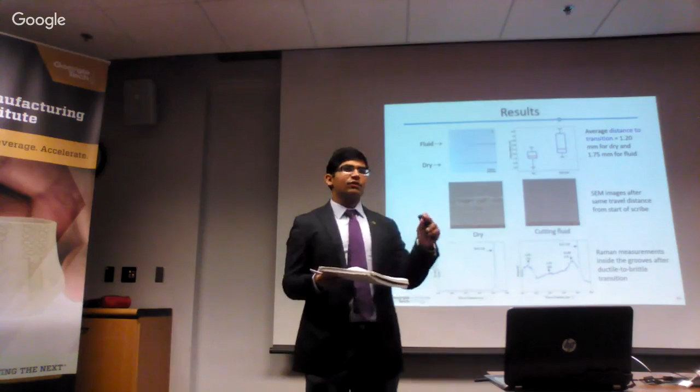But in literature, we found that if you put a surface charge on silicon, the dislocations move differently versus no charge at all, right? With zeta potential, there is surely a difference in the surface charge and the bulk. That's why we see a zeta potential. That is the electrostatic potential difference. So whenever we are putting a surface charge, that is the same as putting two wires on silicon. We have seen in literature, like in electronics, that the surface charges cause dislocations to move differently.

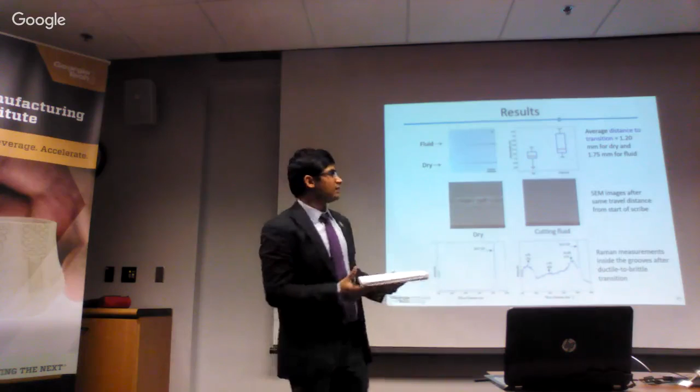So because of the ionic liquid in contact with the silicon, which is an electronic material, we are providing this hypothesis that here also the ionic liquid causes some surface charge, which causes the dislocations to move and make it softer. But you're right that we cannot. There might be an effect because the load is there. You have not verified the dislocation. I'm basing this hypothesis on the previous work of Westwood and Yost and Williams.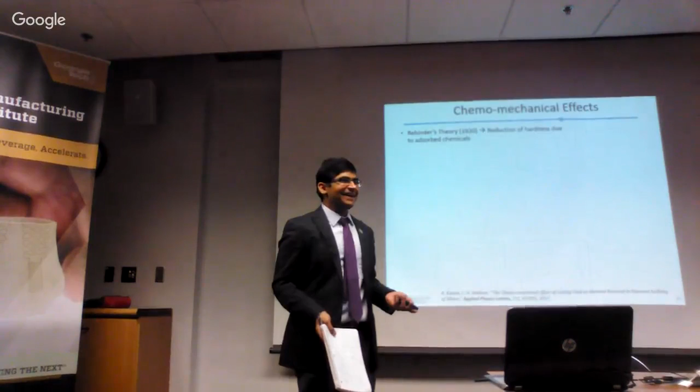All right, like I said, we could go on for hours on this. But I want to make a point. Okay, so I'll ask you a question to make a point. On the Raman spectrum for the diamond hardness, how confident are you that you can measure a 0.2 reciprocal wave number change between those two images? So the resolution, Dr. Melkote had asked me this question earlier also. I never even thought of it. Right. But you're making a big point of this, right? So you need to say, I have a lot of confidence in this change or not.

So the resolution of the Raman spectroscopy is 0.6 or 0.5 centimeter inverse, and this is not 0.2, but 2 centimeter inverse change. Now, I think we have done this debate earlier about Raman showing higher stresses compared to our polariscopy results. The whole point of this study was to find if graphitization is taking place. We found that graphitization did not take place, because in some previous study people had found graphitization when diamond wire sawing is taking place. But we found there is still a shift, and that could be because we went only 320 millimeters. In diamond wire sawing, it goes for kilometers with those spools of wire.

I'm talking about the 0.4. Oh, okay. So you're saying this 0.4 is significant or not? So how do you believe it's significant? I believe it's significant because this was done over many measurements and then we took the average and standard deviation. We found it to be consistently higher for the multicrystalline silicon case compared to monocrystalline silicon. And it's consistent with the story we have that the forces are higher and it is expected to create higher stresses. So it validated what we were seeing earlier. And it also validated that the radius of curvature change was more. So it was very consistent with the story which we found.

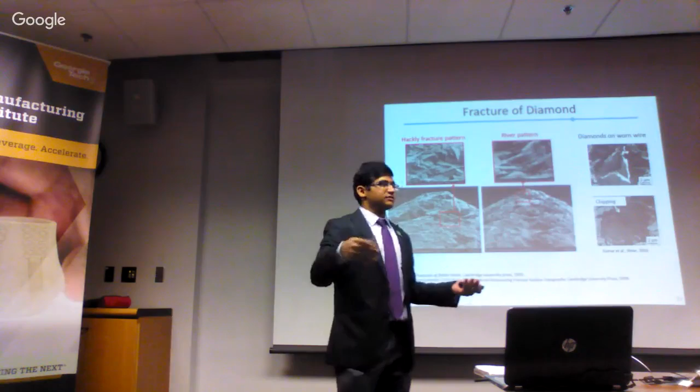And so whatever differences we see may not be as significantly different. One can come and argue and say, oh, mono is also wearing more, right? And that's true. In the previous task, we saw monocrystalline silicon wafers being cut by diamond, and diamond showed a lot of fracture. These are cut by monocrystalline silicon, right? These wires. So these are actual diamond on the wire. So monocrystalline silicon also wears the diamond. I'm just making the point here that multicrystalline silicon wears it more, or creates more forces, which is expected to create more stresses, applied stress as well as residual stress. And the radius of curvature of the tip is rounding more, blunting more when cutting multicrystalline

compared to mono. Would you say that if you had gone longer distance than just 320 millimeters, you would expect that difference to grow, and maybe the confidence level of your conclusions about the residual stress in particular to be greater? So maybe you have to couch. Anyway, that's my question.

So on that note, I'll address that question, because 320 millimeters is a very small distance compared to the actual distance moved in diamond wire sawing, which is kilometers. I think those spools can hold 50 kilometers of wire, which is huge. And so a wire or abrasive moves for many, many kilometers before it is taken off from the ingot. We have not gone that much. If we had gone that much, it might have created graphitization. And there is prior work, like the Yang et al. work, which showed 2 out of 20 abrasives they had analyzed showed graphite. So they also found similar phase transformation along the same order of magnitude of difference in residual stresses.

So what I see here, I'm confident that it is showing a trend, but I acknowledge Dr. Melkote's comment that if we go longer, the trends might be more prominent. But the trend here is enough to answer the question that multicrystalline silicon is more aggressive on diamond compared to mono.

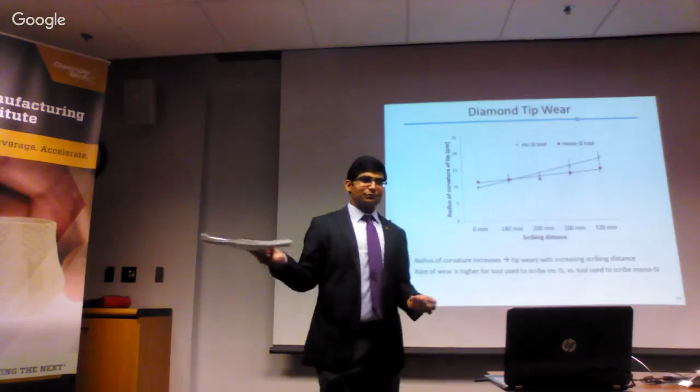So I acknowledge the fact that I'm doing very low speed scribing experiments, and there would be an effect of speed, which is part of the proposed future work. In the actual wire sawing process, it's moving at 10 to 15 meters per second, and I'm moving at less than 1/10 of that. Huge difference, and we know in cutting operations, the speed would affect the amount of energy going into the process, might affect temperature.

Here we're only talking about stresses, and I did not talk about temperature at all, because I found using empirical models the temperature increase is not high, not more than 100 degrees Celsius, which would not create any change on diamond. But with dynamics, I am expecting there will be more effect of temperature and other things, which will create more wear. But that would affect both mono and multi equally. So the results here would still hold, but we have to take dynamics into account. All right, thank you. Chris?

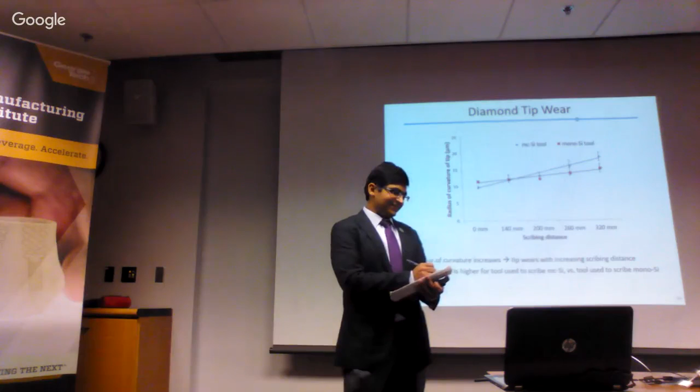Yeah, two general questions. One on the part orientation and cracking, and the other on the K1C measurements that you did. The first one: can you go to slide 23? Just want to understand what the relative orientations are here. I think I might have asked this during the proposal. So when you're cutting these wafers, what do you think is more important from a damage perspective? Is it the lateral cracks or the median cracks? To the final performance, whatever it is. I think you reported flexural strength in one. Fracture strength.

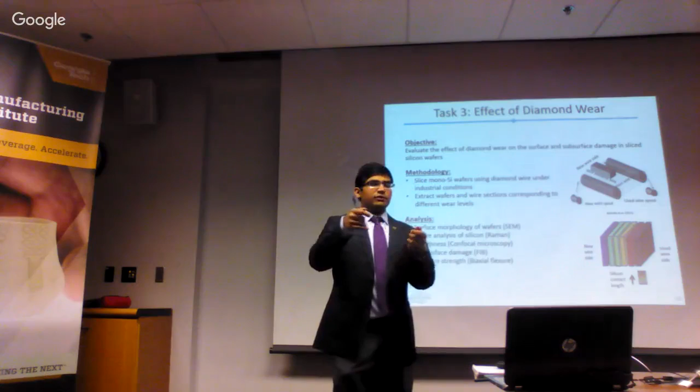So for fracture strength, the median cracks are more important. If you have median cracks, that is perpendicular to the surface. So if you bend a wafer, any crack which is perpendicular to the surface would open up and cause fracture. So median cracks are more important from a fracture perspective compared to lateral cracks.

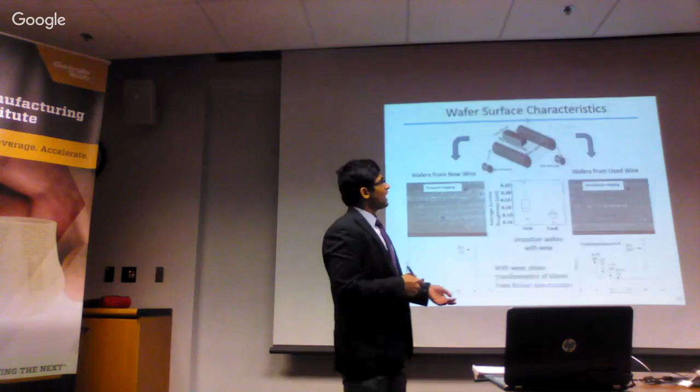In fact, they mentioned that you see more lateral cracks on the wafers cut by the new wire, and they are expected to chip out. And that's exactly what we see on the surface morphology, more chipping. So the results are actually very consistent. The surface shows more chipping, meaning there are more lateral cracks chipping out. And that's what we see in the subsurface, whereas the surface for used wire wafers does not show as much chipping because there are cracks which are deeper, median cracks.

So are we looking at the sidewall? This is a nice figure actually. Am I looking at the flat surface of the side cut? I did have a picture of the kerf which Dr. Daniluk had done a long time back in SEM. I have to see if it's in the back of the slides.

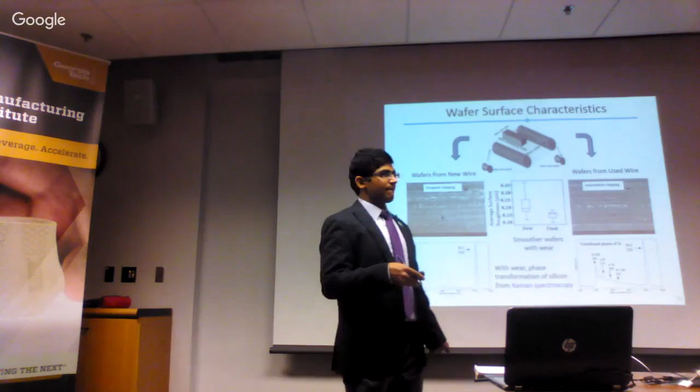So wouldn't the median cracks, as you have described them in this context, be along the sawing direction? So as you cleave through the wafer, wouldn't the lateral cracks be the ones that are left in the actual wafer itself? That's a good question. That's the kerf question. Yes, I have the kerf somewhere. I think we did talk about this. Okay, so the kerf, as you are speaking, I should have put this back in the slide.

So whenever abrasive is contacting with silicon, what we are seeing here is these wafers, the side walls of the kerf. And let's see this abrasive, right? It creates median cracks as well as lateral cracks. The lateral cracks are chipping out. So if this becomes a wafer like this, the lateral cracks are chipping out, and the median cracks are perpendicular to the wall. So if you get to the deeper trenches, you're putting median cracks into the wall.

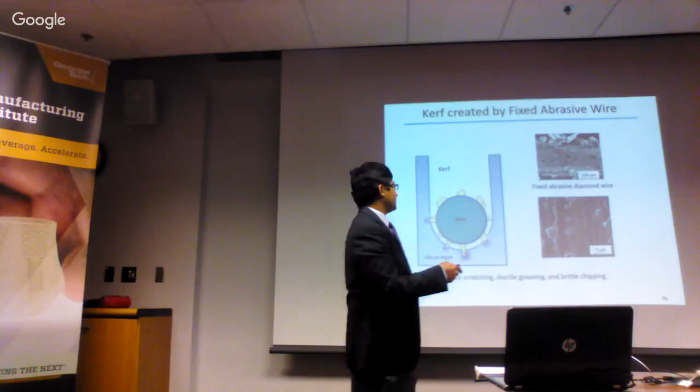And what you're saying about the cutting operation here, that's what happened in the material removal here. That's the maximum material removal. Can you move to the side, please? So here, the material is getting removed because of median cracks which are going here and cleaving, and lateral cracks are just removing the chips. But what if the lateral crack right underneath the wire is big enough that it goes into the wafer?

So the wire size is 140 microns. The crack size is 10, 20, maximum 40 microns I've measured. So half of 140 is 70, 80 microns. It won't go into the wafer. But we did talk about this earlier. That's very helpful. And just as a follow-up, what is the typical post-process after a sawing operation? Is there planarization that polishes that out?

So the typical process is etching with KOH to remove the damage, and the damage removal is as much as the crack depth. The damage removal used to be around 40-50 microns earlier, but with recent advances in the abrasive shape with our manufacturer feedback, we found they now only remove 5 to 10 microns of damage by that chemical. Okay, so it's getting on the order of the crack length that you're seeing. But is there any guarantee that they remove all of the cracks?

It's not guaranteed. So it's best to reduce cracking as much as possible. And cracking is a stochastic random fracture process. So I am investigating, let's say, 25 locations, and I found the maximum crack is 9 or 10 microns. But I might have missed a 40 micron crack which is there. And that could cause fracture later on.

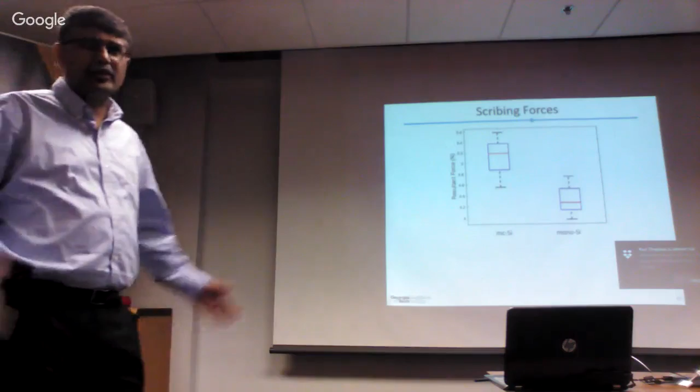Right. All right, gentlemen. So, any concerns? I mean, just as a note, I've taken notes on the questions, some of the interesting discussion we had on the last task. I think it behooves some attention being paid. Now, the paper's already published in Applied Physics Letters, so it's too late to change the paper. But at least in the thesis, I think some discussion and acknowledgement of other possibilities.

And I think personally, if he can go and look at the indent depths when he did the indentation hardness measurements to see if the indent depths were any different. But they probably were, because he gets different C values, the crack length values. They were. They'd have to be, because the geometry was. So I don't know how you would prove it, but maybe that's another potential source. That's a good point.

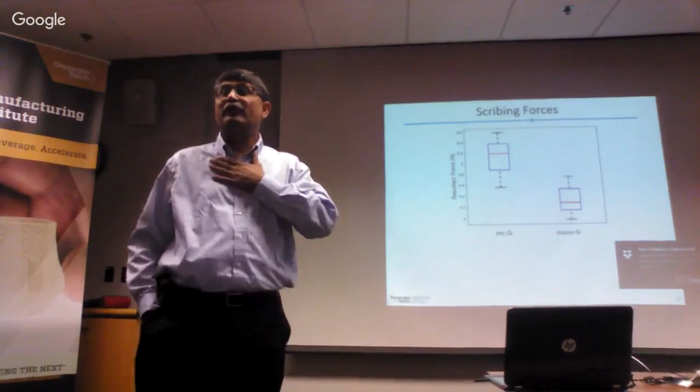This is asking the question, why we see what we see. Yeah. That led us down this path. I forced him down the path to go and see. I remember Steve mentioning many years ago these chemomechanical effects. I said, okay, well, let's dig into this a little deeper. So I have made notes of that. I think some acknowledgement of that would make it a stronger dissertation, a more honest dissertation. And he could just add a bullet in the recommendations for future work. That's true. I think there are some unanswered questions. Of course.

Let me just also chime in. So my group back in the 80s, what happened was, coming back into my long-term memory, if you have water present during the process, whatever the process is, indentation, scribing, the hardness is not that different between water and no water, okay? But if you have alcohol-based fluids, ethanol certainly, acetone, trichloroethylene, people try to relate it to carbon chain lengths that are related to this electrostatic effect. So then it becomes a bigger effect. There's adsorption of these.

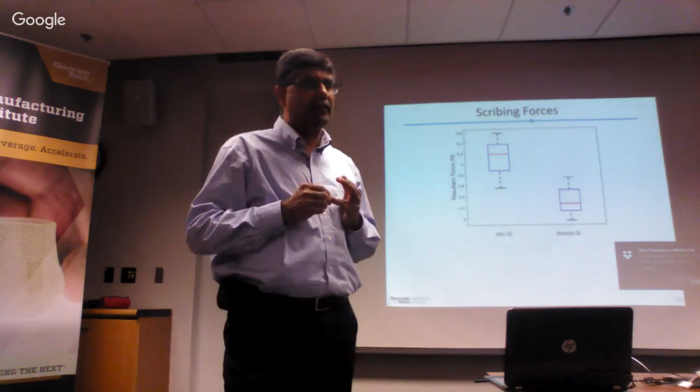So, okay, very good. Do you, as a committee, at least the people here, and this is being recorded, and probably his parents also watching. No, but nevertheless, Chris is going to have access to this, and he will see it, and he will provide his independent feedback. But the question is whether you're comfortable signing. Okay, very good. So I will call him in. Do we need the forms? I'll ask him. I think he has something here.

So and then I probably need to go. Yes, of course. I've got to get out of here too. Yeah, no problem. I'm giving a final right now. Oh, okay. I appreciate it then. Okay, so sit somewhere else. Names are there. You just have to look at your name. All right. Let me call him in. Okay. Yeah. How are you doing? I haven't seen you in a while. Doing all right.

So, I will refrain from congratulating you yet, only because I think we still have another committee member. But the committee members here are happy with your work. And they've agreed to, and if you have any comments, yes, please give it to him and we'll make sure they get addressed. I have some notes and we'll talk about how we might address some of the comments that came up. And that's it. And then I'll congratulate you after Chris is done. Okay, thank you very much. Yeah. Thanks a lot, Chris. Thanks, Rick. Thank you. Enjoy.